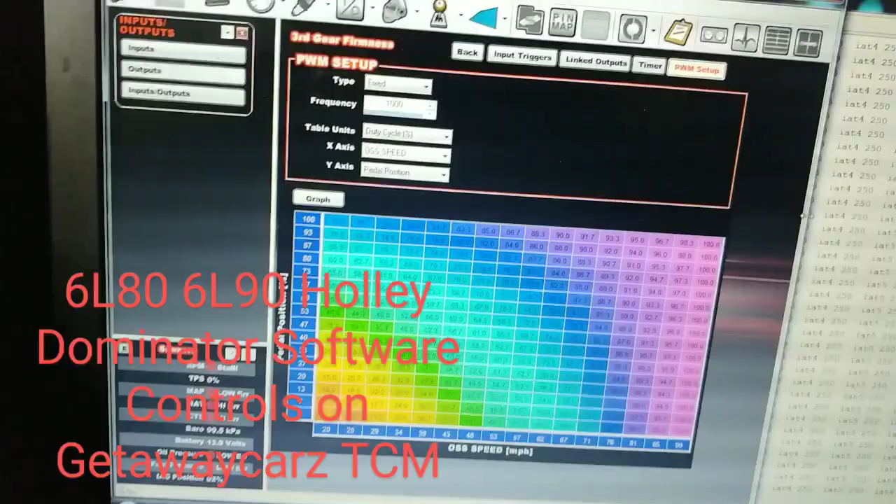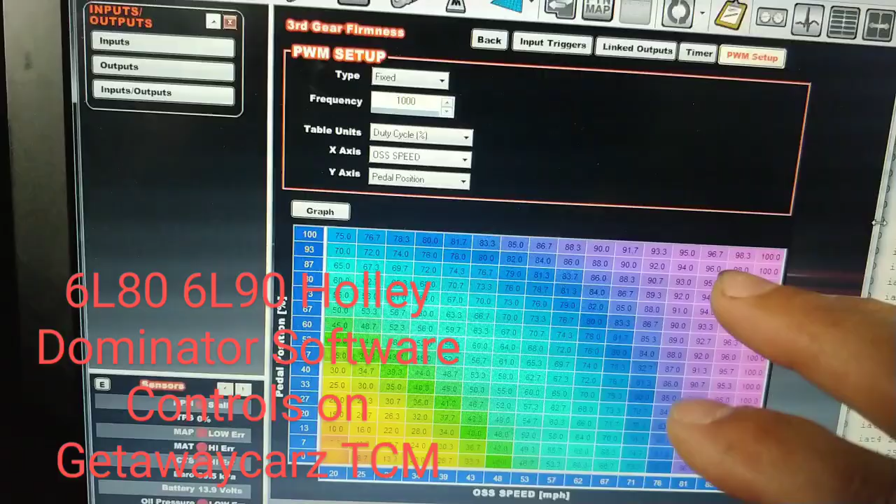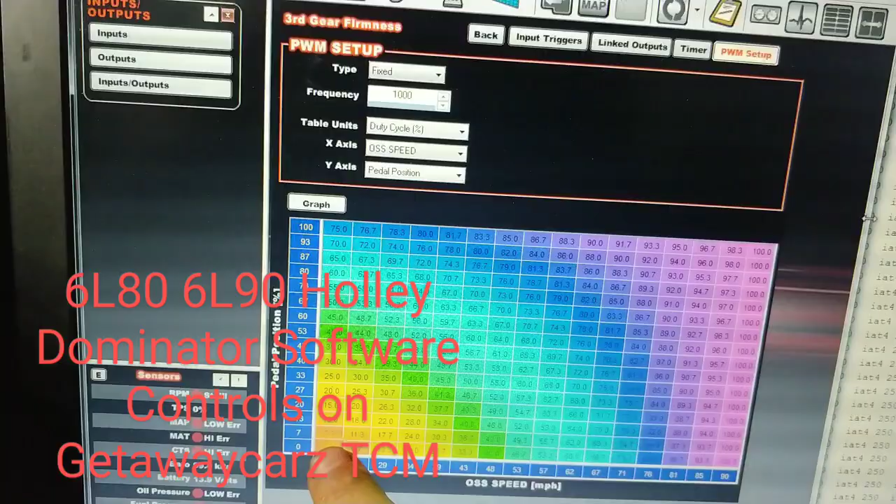So this is the new output from the Holley Dominator here. This is the third gear firmness. This is what I'm calling this. It's just anytime you get into third gear, whether it's an upshift or a downshift, how is the firm feel going to act? So you can tune that, and I'm trying to make this easy numbers, 0 to 100. For the end user; on my end, it's a bunch of other numbers, but 0 meaning weak and smooth, 100 meaning firm as hell. So it's just a pulse width setup for the output.

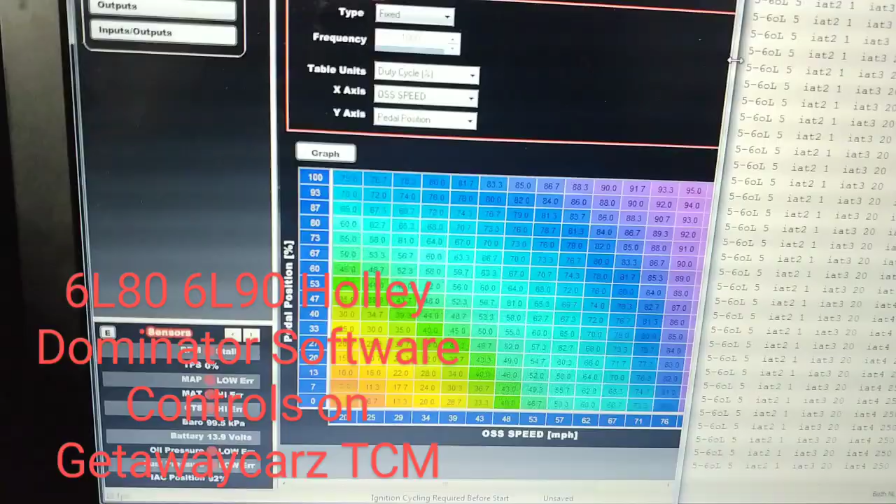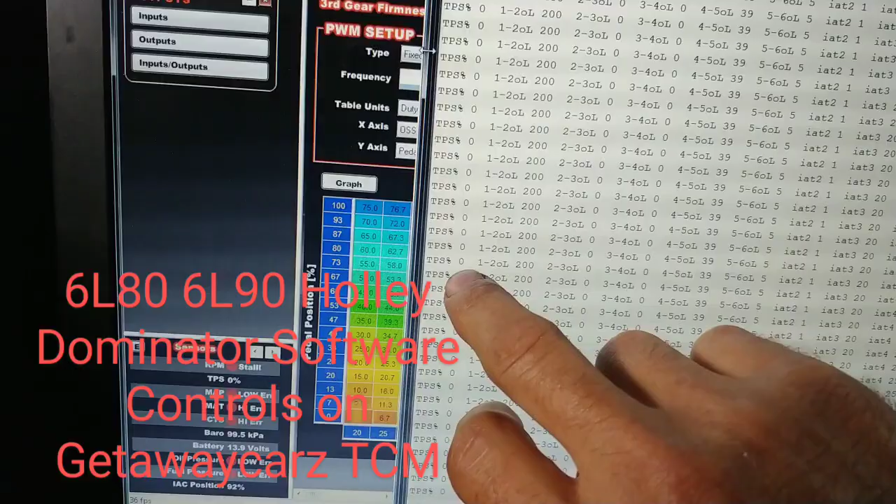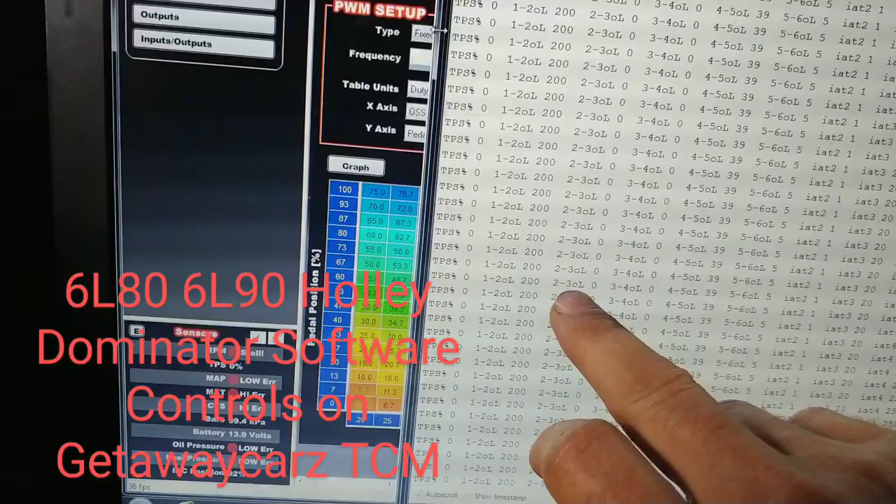And let me just show you how this works here. I have a screen. I'll just have to minimize this one a little bit. Alright, so you can see my actual throttle position. This is my TCM on this side. So my TPS is also tapped into the gas pedal. Now we're looking at it like the 2-3. This really should just be a 3 overlap, because anytime you get into 3, whether it's an upshift or a downshift, these numbers are going to change depending on this graph.

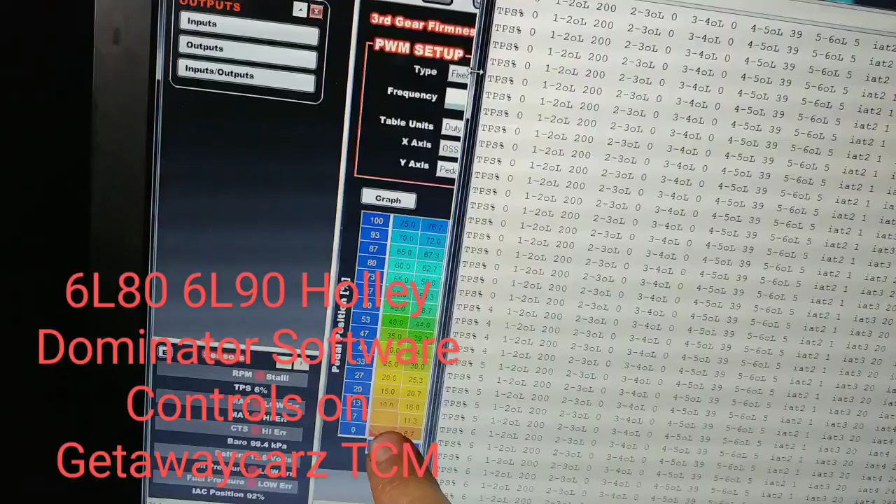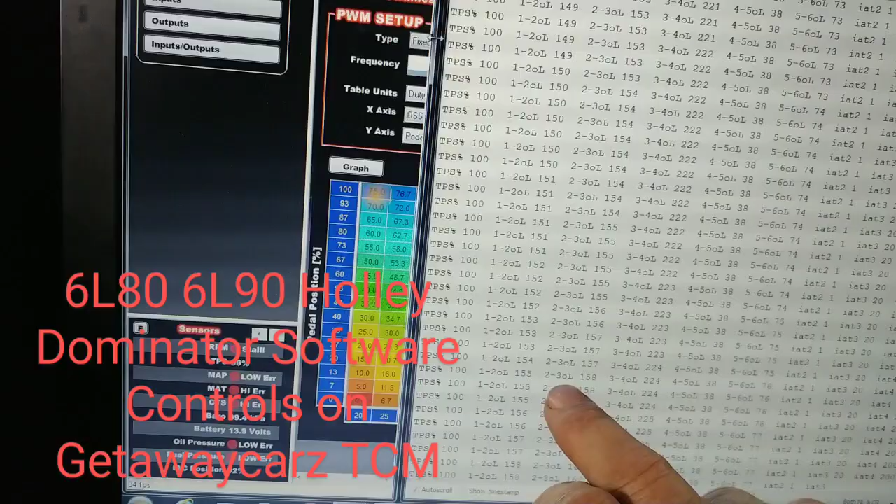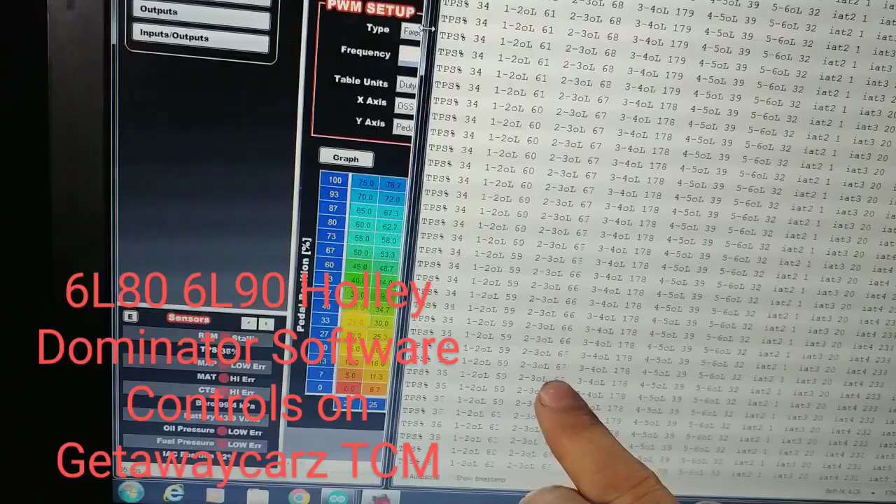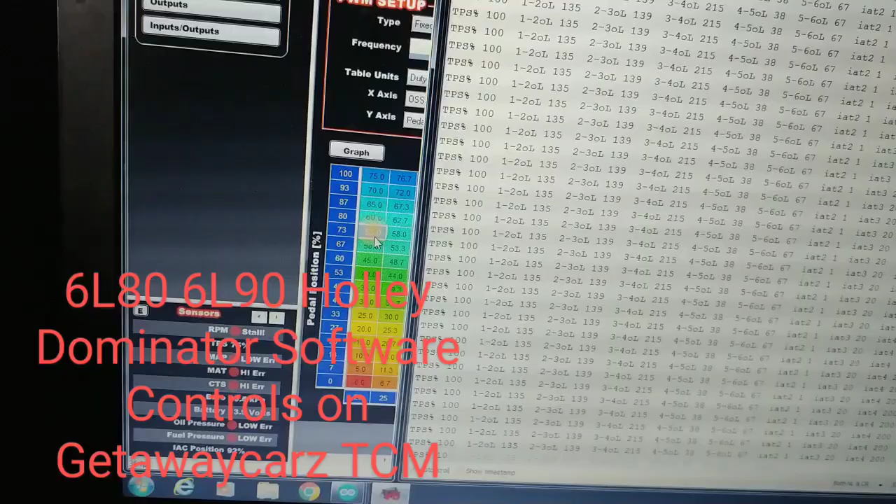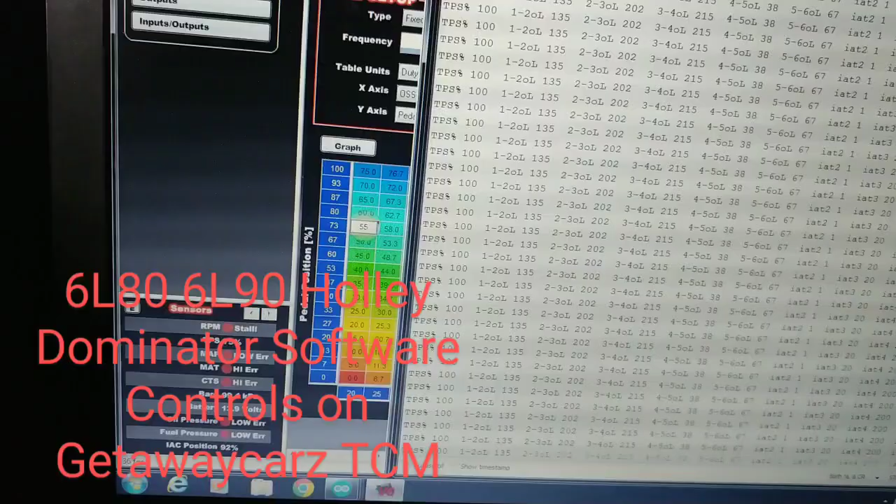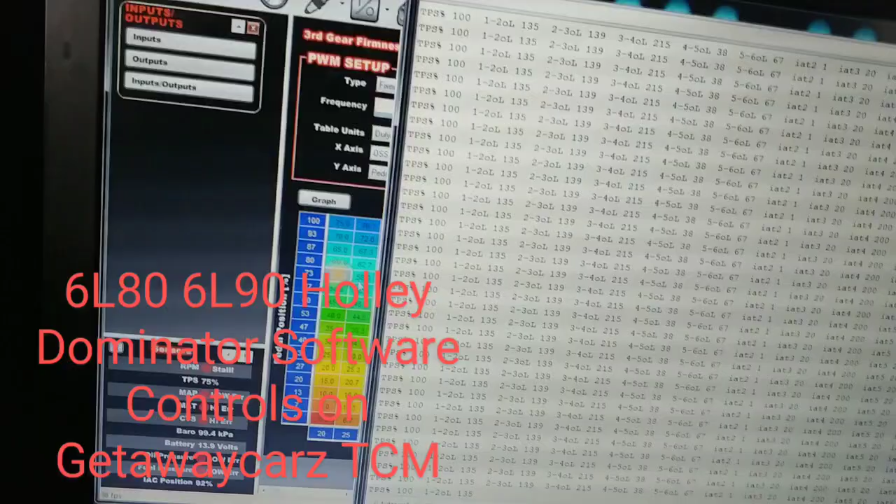So you can see here, just for shits and giggles, that says 55, right? Watch that 2-3. I'm going to put 100 in there and hit enter. And boom. So, see the reaction time of that though? It's a little slow. I'm going to speed that up. But again, that's on my end. By the way, it works. So the handoffs are now capable of being tuned with the... It's hard to do this while watching a phone.

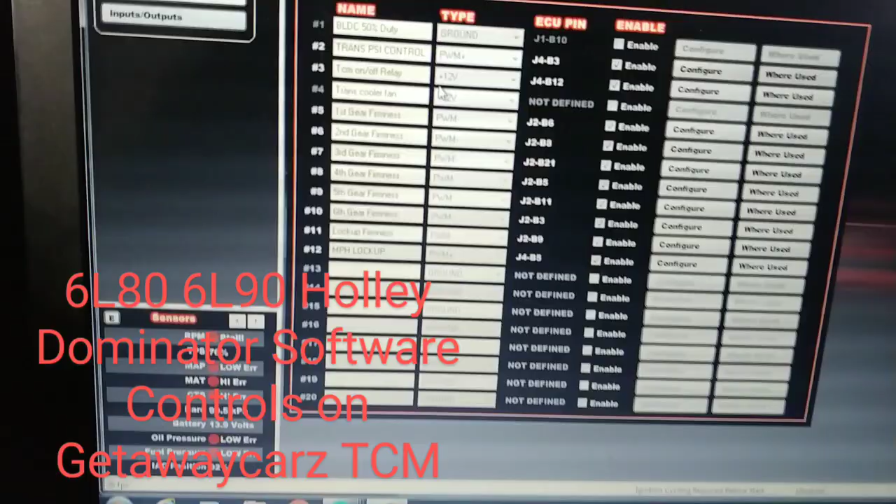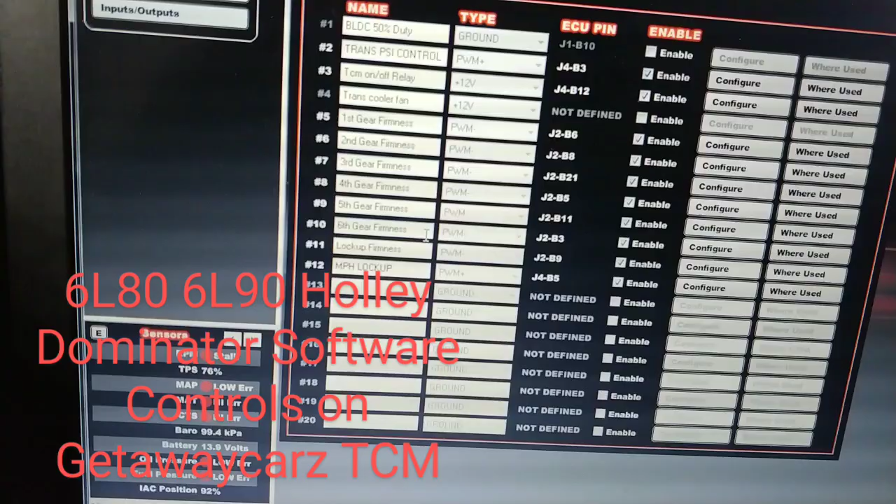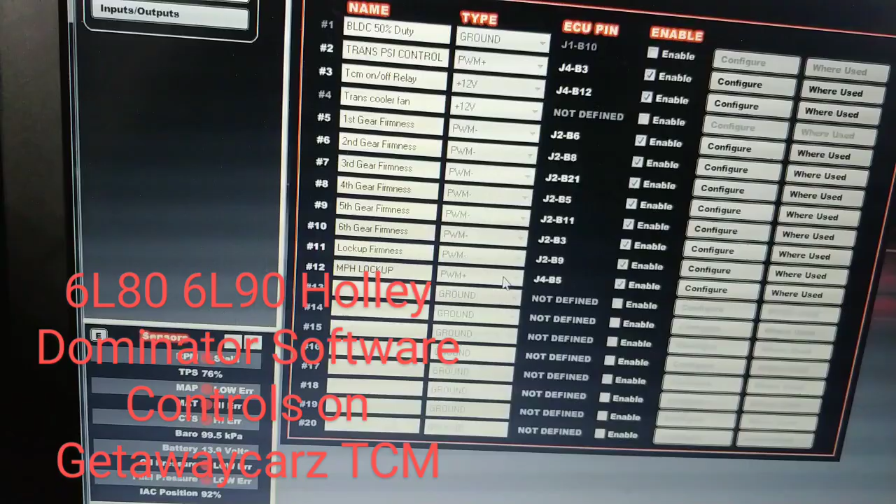And we got one for each of the gears. First gear, I may have to just make that a pressure dump, but I'll figure something out. But each of the gears, the lockup firmness, that's actually gonna go away. I have a different one for that. Right here, the mile/hour lockup. This is when you're in like manual mode, and this is just an output that I just made up here.

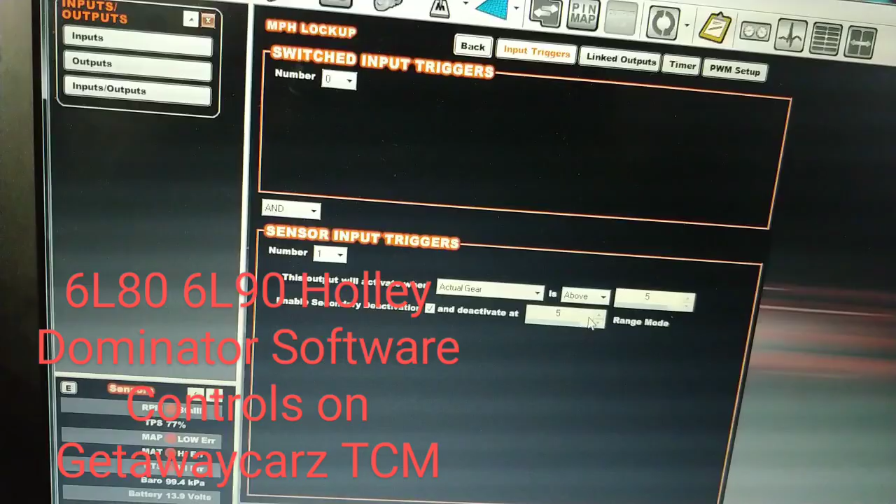So you go to pulse width. So you pick a gear you want it to. So this one, 6th gear, you got to be in, and it turns off when you're back down to 5th gear. And same sort of thing. Oh, still holding my foot on the gas. Set your mile an hour down here, and we were figuring out 1 mile an hour difference where you actually wanted it. Put a window in there for yourself. If you want wide open throttle lockups, go all the way up. But for the most part, this would be your daily use. This would be your street driving.

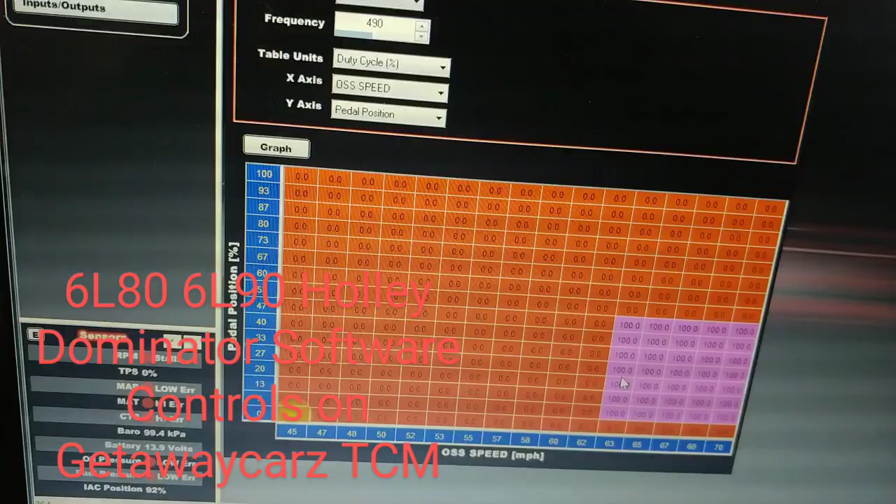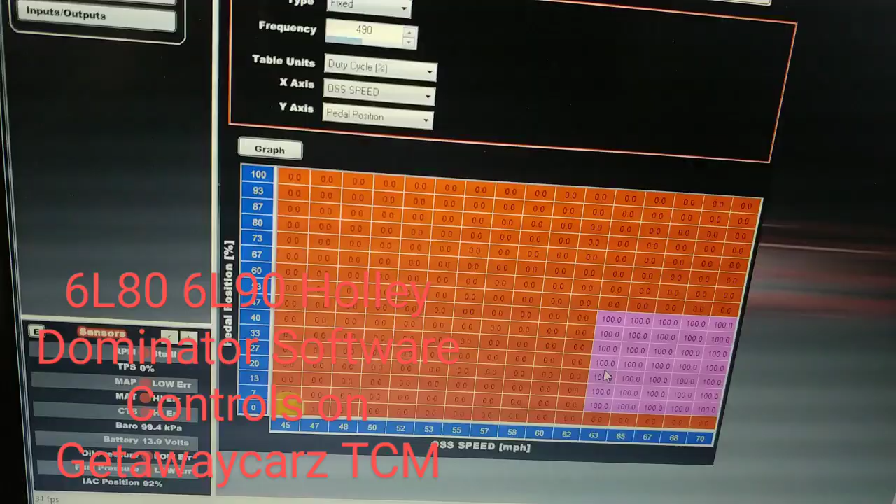So if it's like a drag and drive car, you're gonna want to get up into that higher gear. Just have the lockup kick on, get rid of that 4500 stall you have. This will do the job, and you won't have to work off any other tune parameters. This will just always be there. And again, when you go to the track or something like that, you could just turn this off.

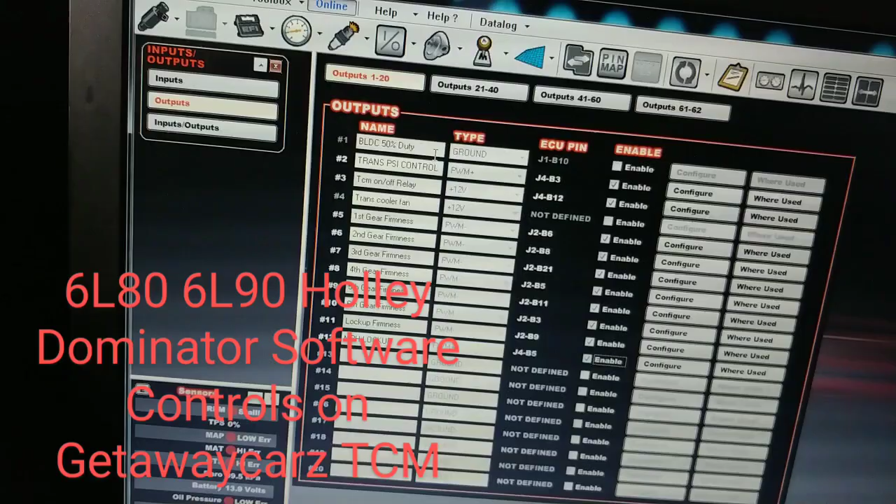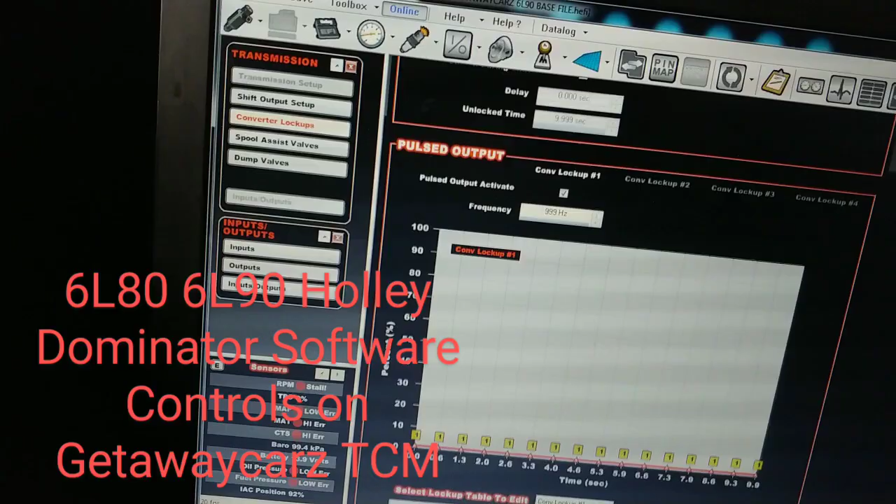Bloop. And now you work off the track one. I'll turn it back on before we exit here. You go back to transmission, and go to converter lockup. You have just this one output. You would set this up to work. Let's see, we go scroll down. Now what's cool about this is there's an offset for this per gear I was shown. So I just put this to 1, and the multiplier does a multiplying up to 100%. I'm guessing if you put a 0, 0 times 100 is a 0. So you put a 1 here across the board, right?

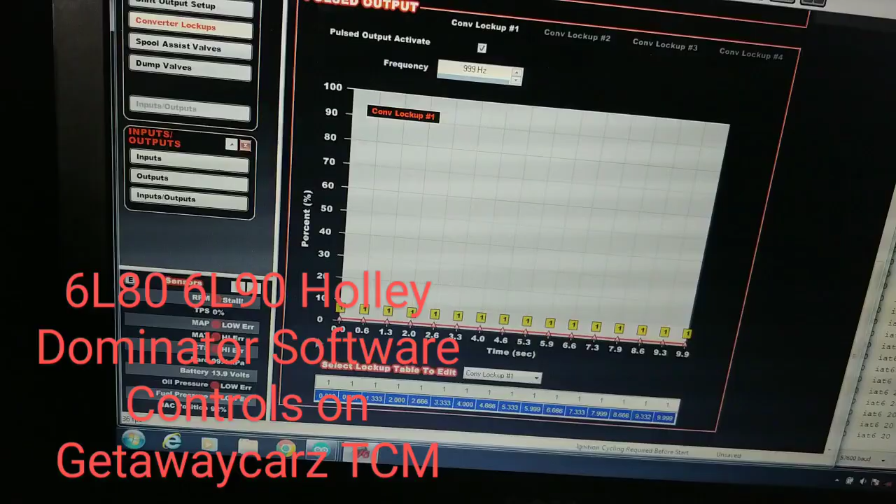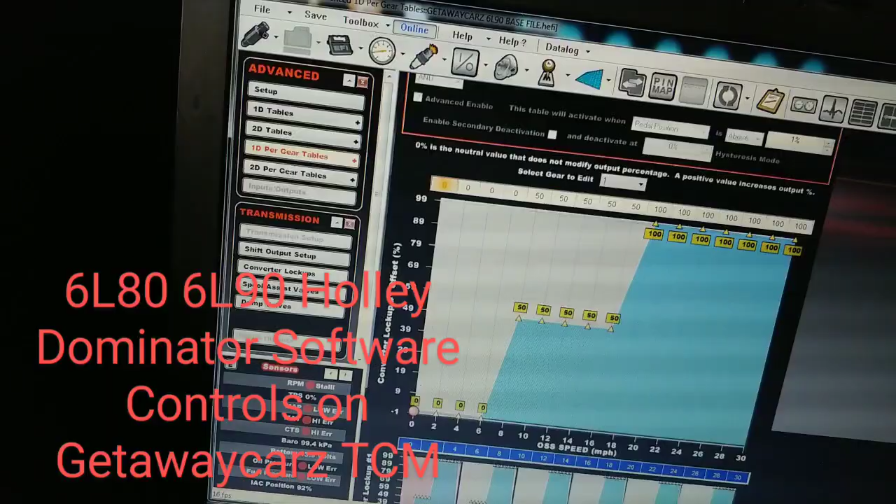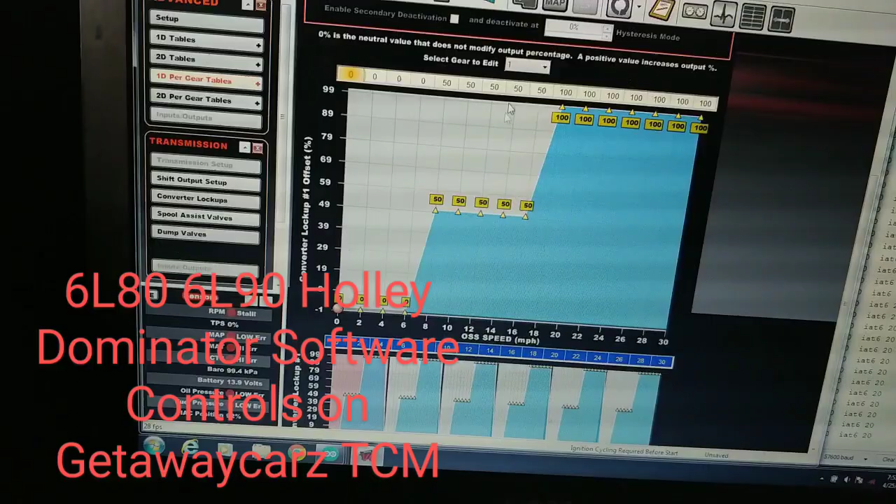And then what we do is we go up into the advanced tables. You go to your 1D per gear table here. Let's say pulse width modulated lockup. And then here is your lockup setup. So this is for first gear, and these are just random numbers I threw in just to test. Haven't tested in the car, on the lift, not even running, just to watch the values on my end move. So you're gonna want this to ramp in a lot faster than this. This will kill your converter, but you can pulse this. So if you wanted to, you can fade it in if it's a little aggressive.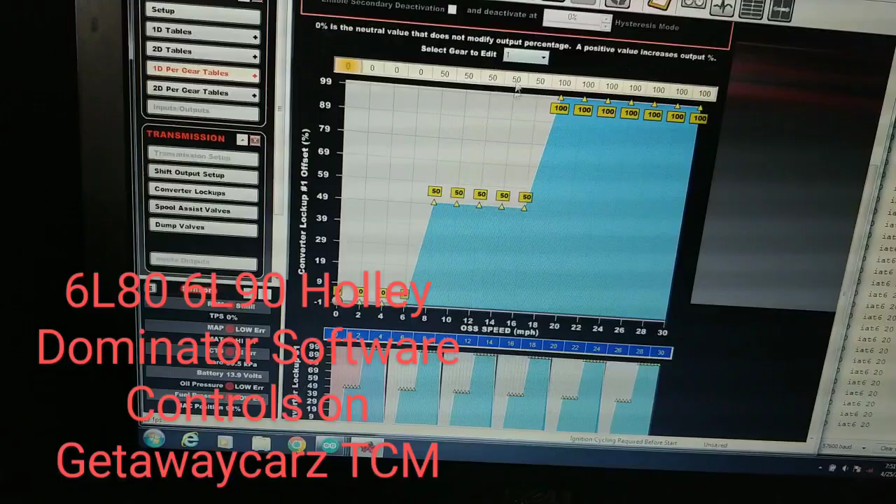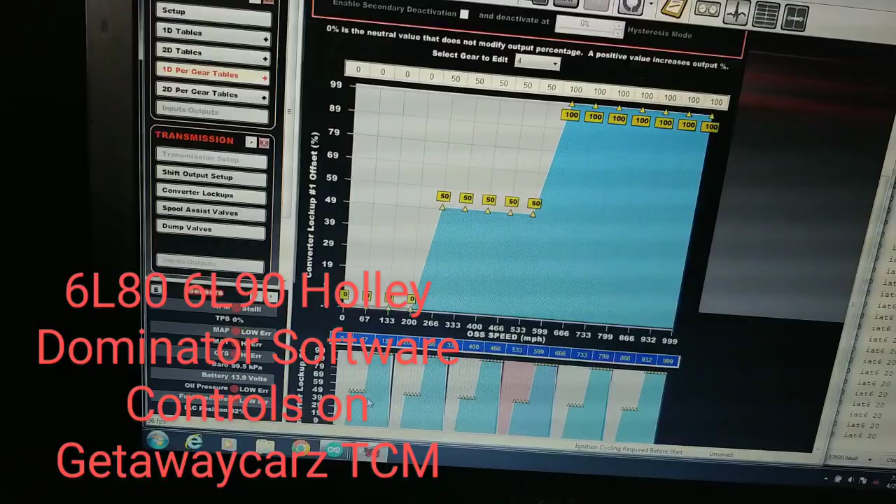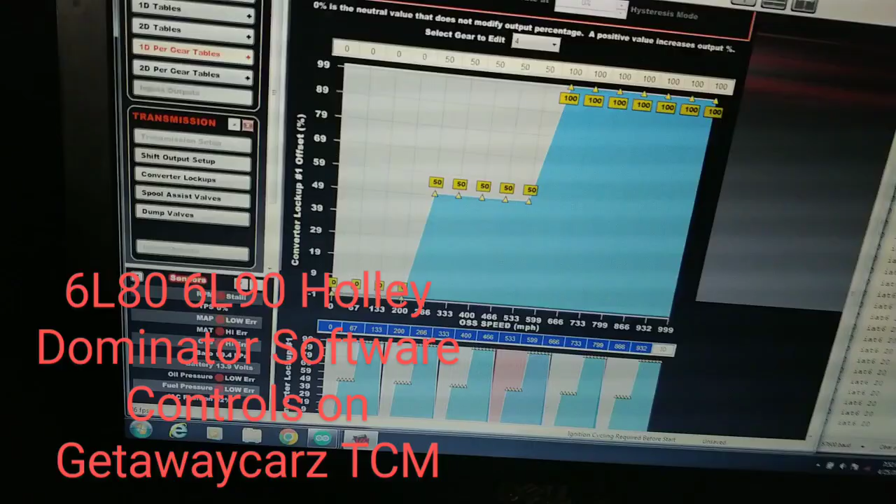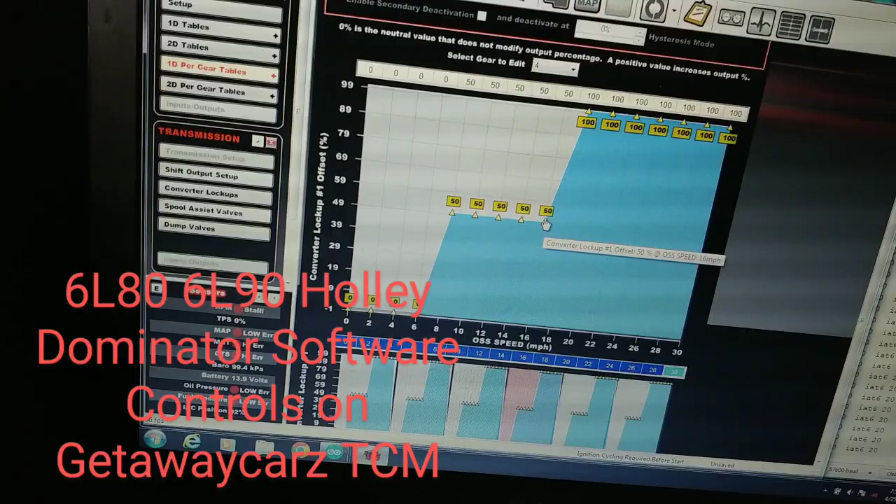And you got 6 gears since it's a 6L80, 6L90. I just have them all set up the same in here. But you let go of the trans brake, let's say you take off actually in first gear. Let's say you have a 400, 500 horse car, you're still using first gear, or a Corvette or something, or a truck with the heavy weight, you use that first, you take off. We could set up these mile-an-hours. Let's say you get up to 18 miles an hour here, and you just want the lockup to kick 50% on and then go to 100. You can do that. Then the next gear you can do a different thing. So that's kind of neat.

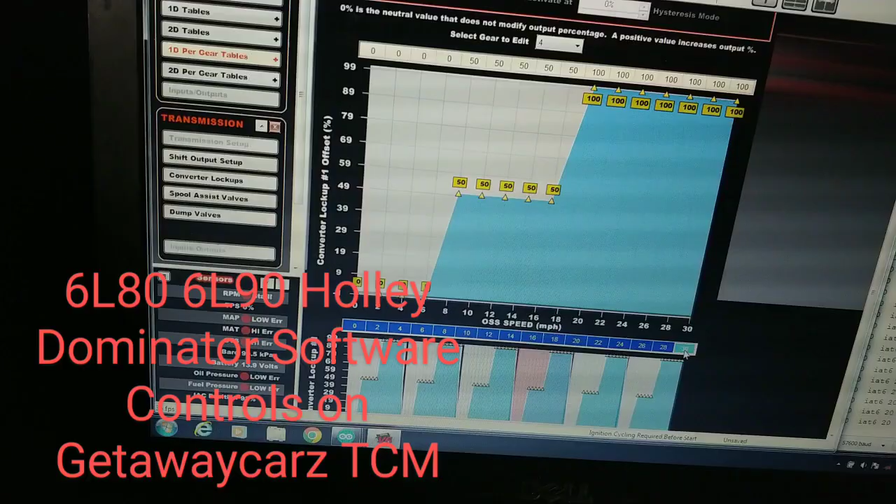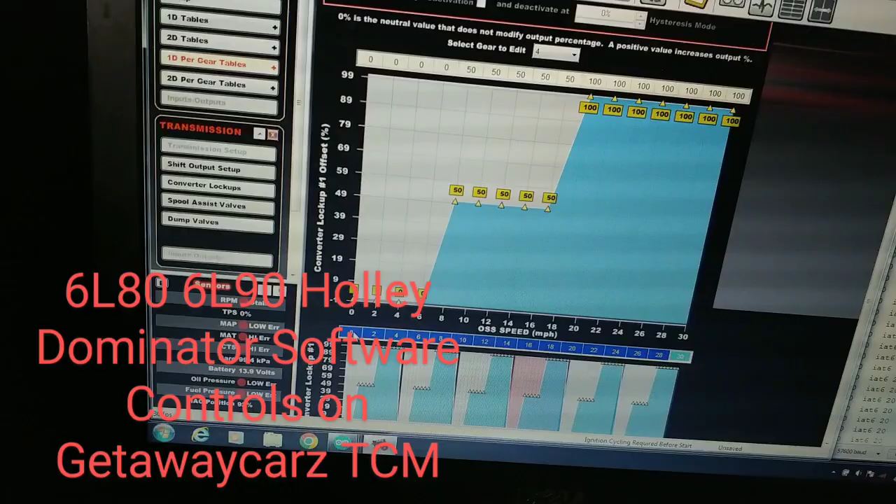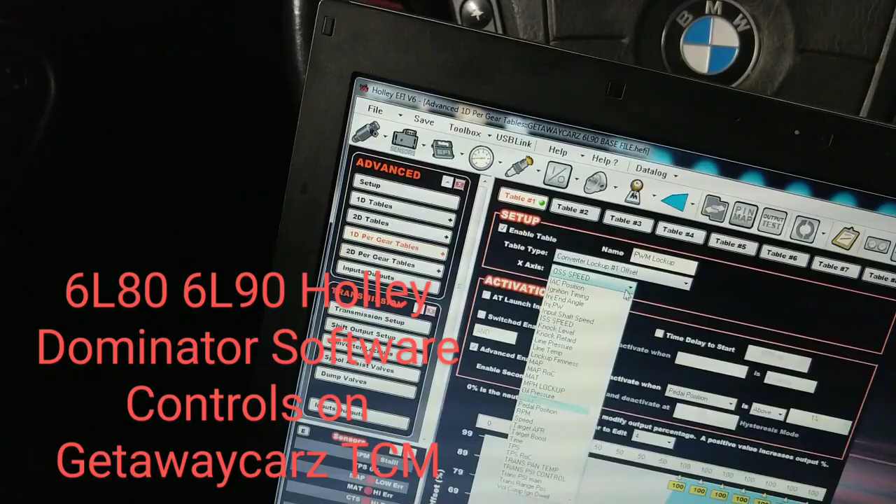This is for fourth gear, so I have to figure out, but you do your math and you figure out what gear gets you from your minimum to your maximum, where you'd want the lockup range to be. You don't have to go to full min-max of that RPM, but if I'm not mistaken, well, I'm live, I can't change it, hold on, I think I can just run this off engine RPM, if you want to just go that way.

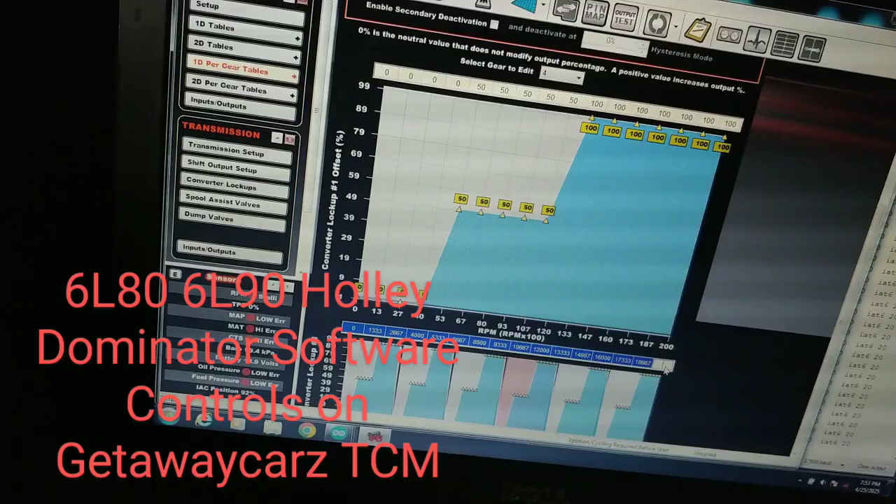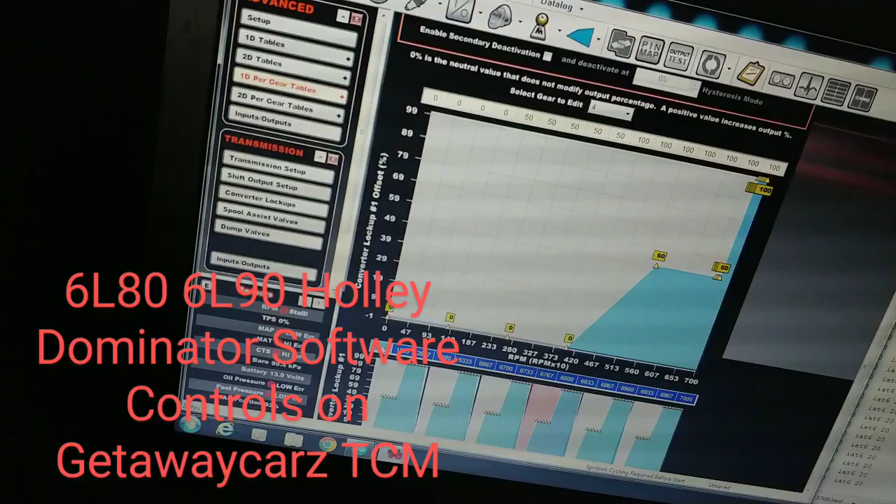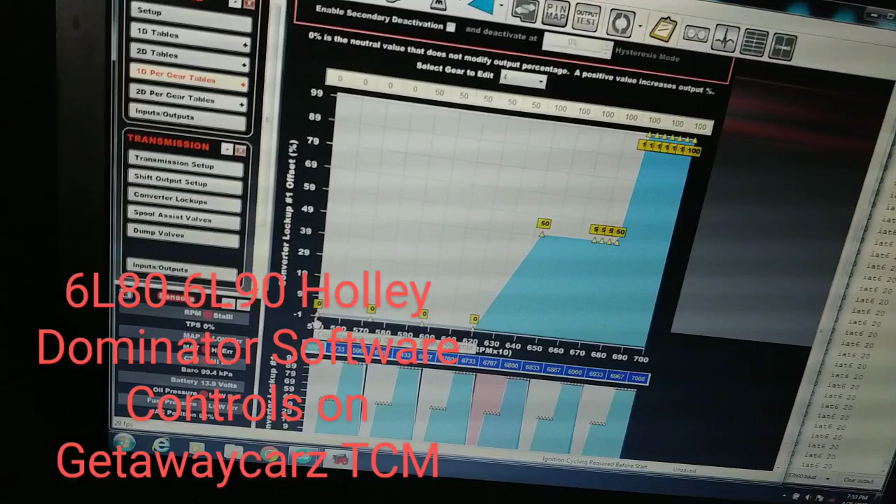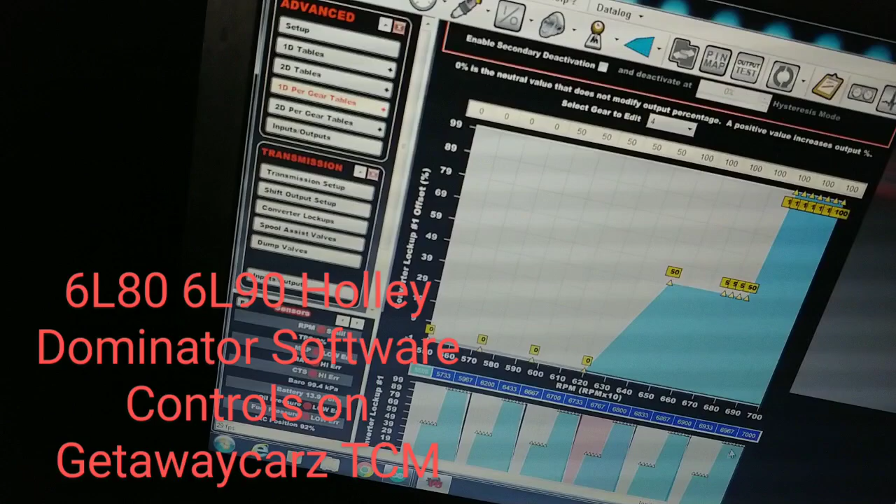And then come down here, and you change this RPM to, on the high end, the latest you want this thing probably to kick on, let's say 7,000. And then the earliest you want this thing to kick on, and not be on yet, let's say would be 5,500 or something. So there's your range. So right now it looks like 6,200. It's going to start kicking this thing on, and then it'll ramp it up. Okay, so that's what you got.